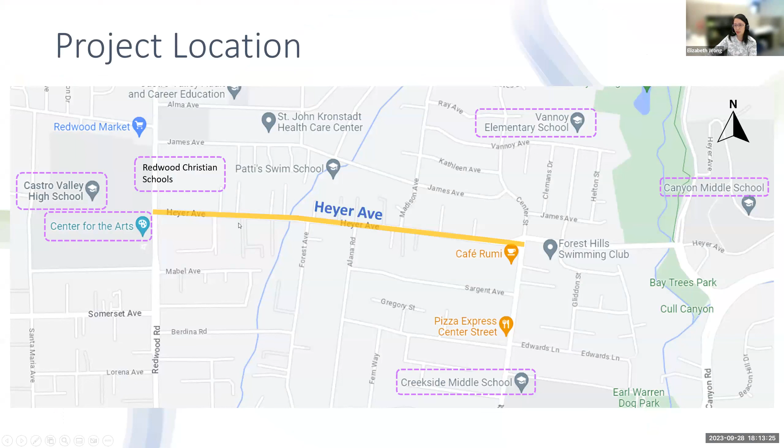Tonight I will present to you the Heyer Avenue Sidewalk Improvement Project. The project is located on Heyer Avenue in Castro Valley, from Redwood Road to Center Street. There are various schools, businesses, and points of interest in the vicinity of this area. Let's look at some of the existing conditions of the sidewalk.

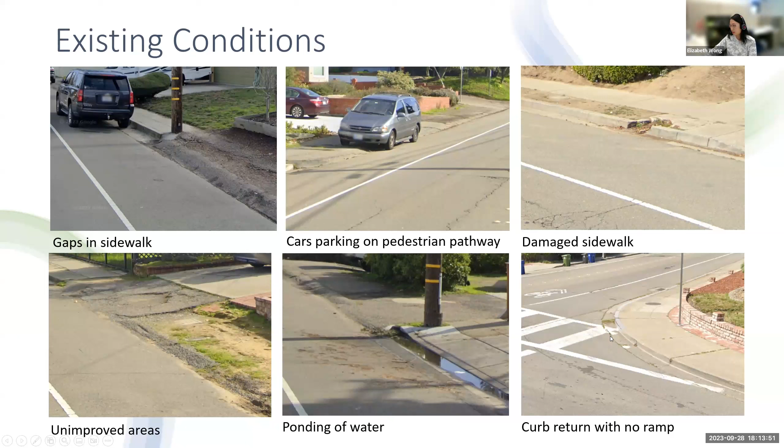Looking at the site photos, we can find gaps in sidewalk. There are cars parking on pedestrian pathways due to lack of vertical curbs. Some of the areas are damaged on the sidewalk, unimproved areas. We also find ponding of water and curb returns with no ramps.

To summarize what we just saw: gaps in sidewalk, pedestrians walking on the shoulder or roadway because cars are often parked on pedestrian pathways, sidewalk in deteriorated conditions at some locations, lack of proper design and unimproved areas, ponding of water due to lack of continuous standard curb and gutter, and there is also a bus running from Madison Avenue to Center Street on Heyer Avenue.

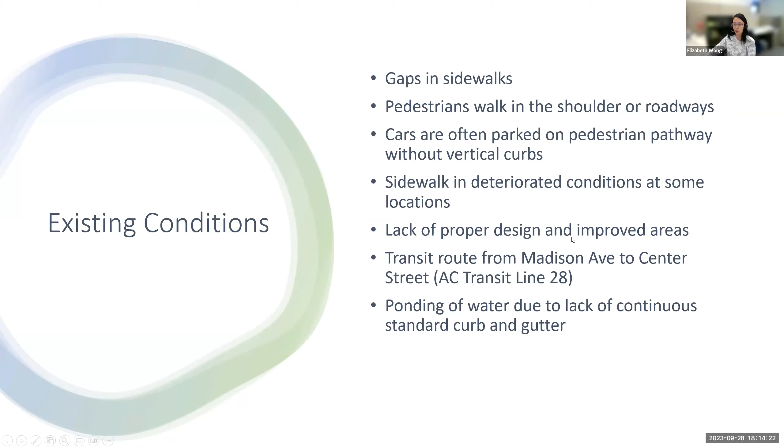This project is in our Bicycle and Pedestrian Master Plan as a prioritized sidewalk project. The plan recommends a Class 2 bike lane for Heyer Avenue between Redwood Road and Center Street. Our goal is to provide a safe and functional corridor for all users that enhances walkability and accessibility to local schools, businesses, and residents; implements pedestrian and bicycle facilities; improves traffic safety; improves drainage; treats roadway stormwater runoff; rehabilitates and repairs the pavement; and improves corridor aesthetics.

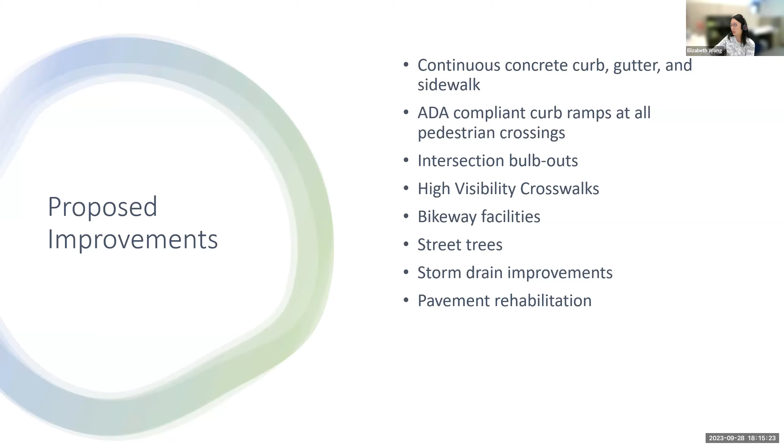To achieve the project goals just mentioned, we propose to provide a continuous concrete curb, gutter, and sidewalk, ADA-compliant curb ramps at all pedestrian crossings, intersection bulb-outs, high visibility crosswalks, bikeway facilities, street trees, storm drain improvements, and pavement rehabilitation. We have developed two design alternatives to incorporate these improvements.

The alternatives were developed keeping in mind constructing the improvements within the county right-of-way of 60 feet. Within this limit, design alternative 1 can provide a Class 2 bike lane on both sides of the road. We can also provide a 7-foot wide sidewalk for pedestrians. Parking on both sides of the road can also be maintained, and we'll put in parkways and trees where necessary. However, the bike lane for this design alternative is not buffered.

Let's look at design alternative 2 that we considered. Within the county right-of-way of 60 feet, a buffered Class 2 bike lane on both sides of the road can be provided, along with a 7 to 8 foot wide sidewalk on both sides. Bulb-outs and street trees will be included. However, on-street parking will be removed on one side of the road.

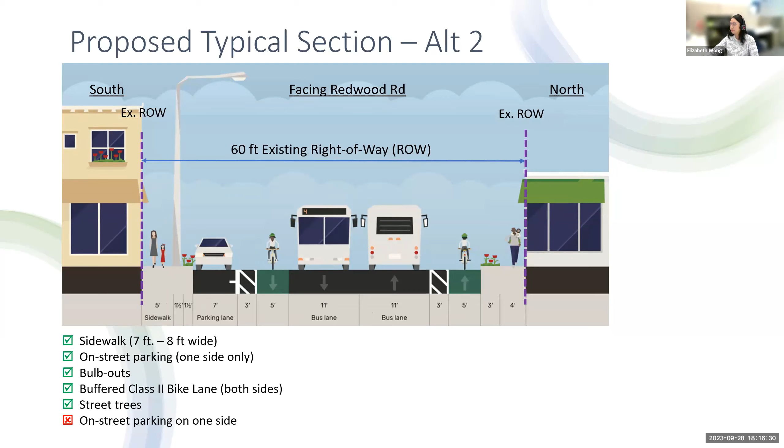Here's a summary table to compare both design alternatives side by side. Alternative 1 is our Class 2 bike lane scheme. For sidewalk, we can maintain a 7-foot wide sidewalk, and we can maintain on-street parking on both sides of the road. We can include bulb-outs and street trees. However, the bike lane is not buffered.

For design alternative 2, we can offer a buffered Class 2 bike lane. We can keep the sidewalk at about 7 to 8 feet wide. However, there's just only one side, so we can only offer on-street parking for one side of the road. We can also include bulb-outs and street trees.

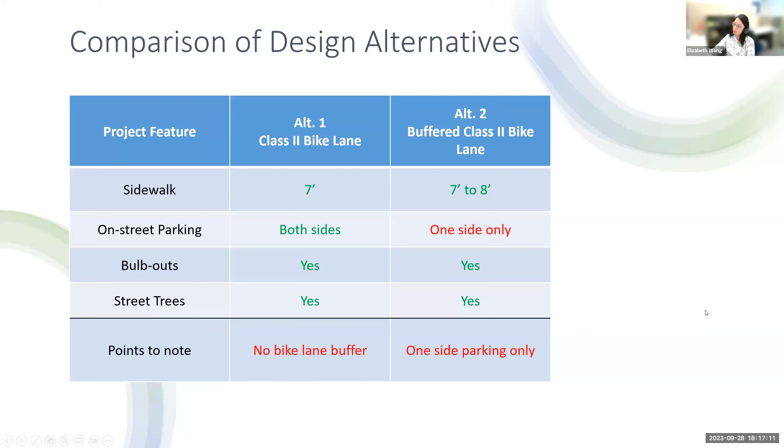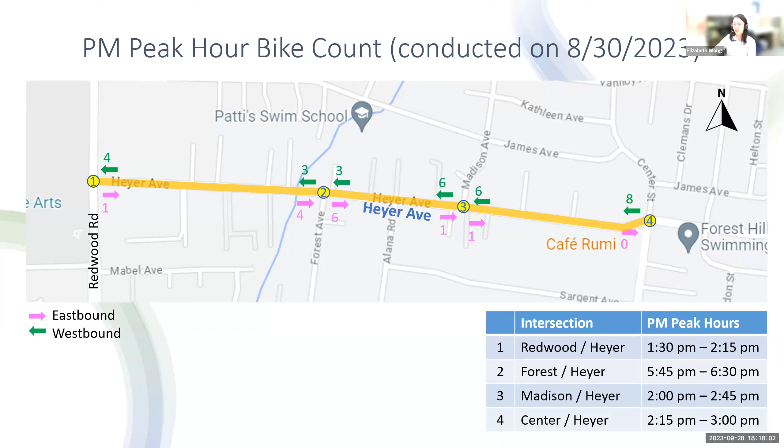This slide shows the bike count at the 4 intersections during afternoon peak hours. Afternoon peak hours happen between 1:30 to 3 p.m. at 3 other intersections, except for Forest and Heyer, which happens at 5:45 to 6:30 p.m.

A recent parking study was also conducted during the period of August 30th to September 6th to observe the parking utilization at various locations along the road.

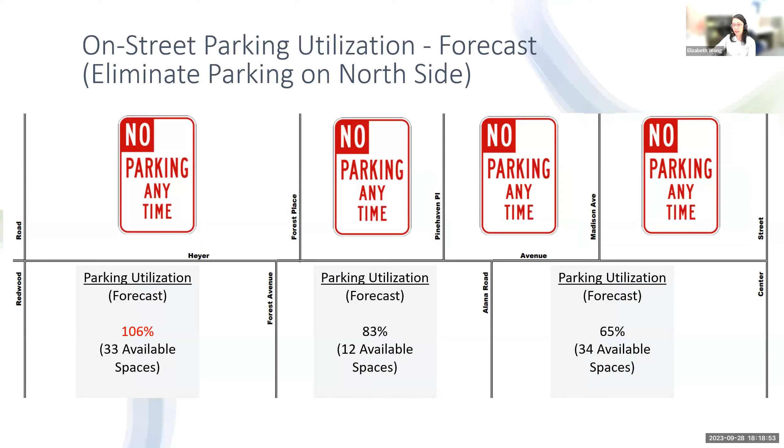This project is planned to be constructed within county right-of-way of 60 feet, but might change as design develops. It requires permits to enter for approximately 82 properties. Encroachments will be removed and property owners will be contacted individually.

We are planning to present this project at a public meeting in spring 2024. Final design is anticipated to be completed by spring 2025 and ready for advertisement in spring '25 as well. Construction and utility relocation will start in summer 2025, and all these dates are tentative.

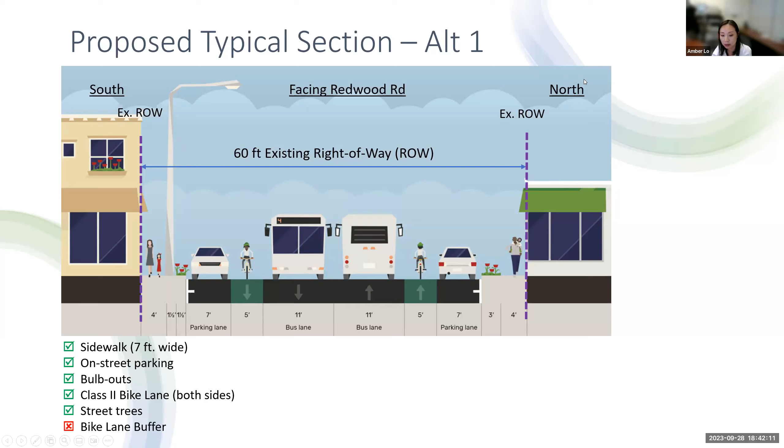Okay, can you hear me? I had actually raised my hand to talk about the previous item as well, which you may have missed, but that's fine, it's on the minutes. But on this, yeah, I think the counts firstly can be very deceptive. I don't know why you do the bike counts, because they always kind of come out low. They obviously will come out low because it's a very dangerous street to bike on. And then all that does is it really starts to create splits in the community, where you get these factions of people saying, well, there's nobody biking, therefore we don't need bike lanes. And it just really starts the whole process off in the wrong way.

The counts don't say anything about demand. And I think Bruce was making this point: what we need to do is measure demand, not current use, in order to drive the need for bike lanes. It's interesting that you don't count pedestrians to justify sidewalks - you just assume sidewalks are good. But if you applied the same concept to sidewalks, it would be interesting.

I don't know why in both examples the parking is against the curb, then the bike lane is to the left of that, and then traffic to the left of that. Why can't the bike lane be against the curb? Because the problem with that design is every time a car parks and leaves, they have to cross the bike lane. You can avoid that by simply switching those two around, having the bike lane to the right and the parking to the left.

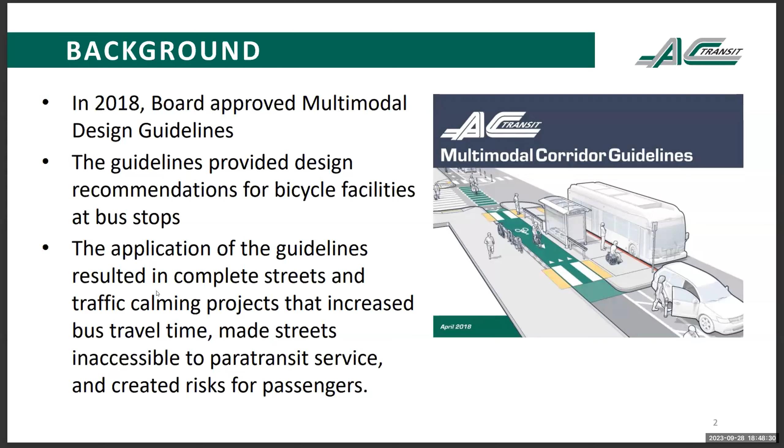This time around, we intend to expand on the guidelines and address how to accommodate paratransit needs, comfort for people accessing and waiting at bus stops, and other transit operational needs that should be considered, like bus layover space. So basically a more comprehensive set of multimodal guidelines that everyone can reference in designing their streetscape improvement projects. And of course, everything is context sensitive, and not everything in the guidelines is going to be applicable to every city street, like streets with constrained right of way or streets designed to carry high traffic volumes. But the overall intent is that the recommendations will be applicable to most streets.

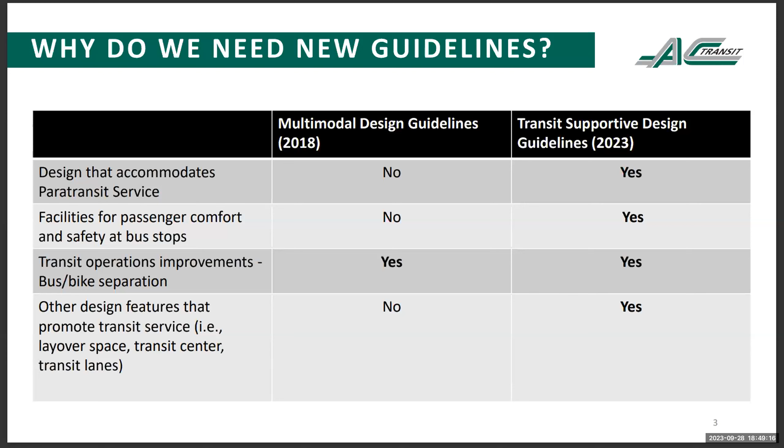I'm not going to go over all of these items, but basically the new guidelines document is going to include all this content and information that jurisdictions can work from, like bus stop dimensions, designs that aren't compatible with transit, minimum width requirements, paratransit operational needs, pedestrian safety and access improvements, bus layover needs, and so on.

On the topic of paratransit service in particular, paratransit is curb to curb service for people using wheelchairs or people with mobility needs. So it requires access to the curb and room on the sidewalk to deploy a lift or a ramp. Unfortunately, there have been instances of projects implemented in the AC Transit service area that preclude access to the curb. So we want to provide guidance on this in the guidelines so that cities and jurisdictions know that paratransit service exists, that it's important to accommodate access for paratransit users, and that there are ways to accommodate paratransit needs in their street designs. Really, mobility for people with disabilities should be accommodated as part of all transit projects.

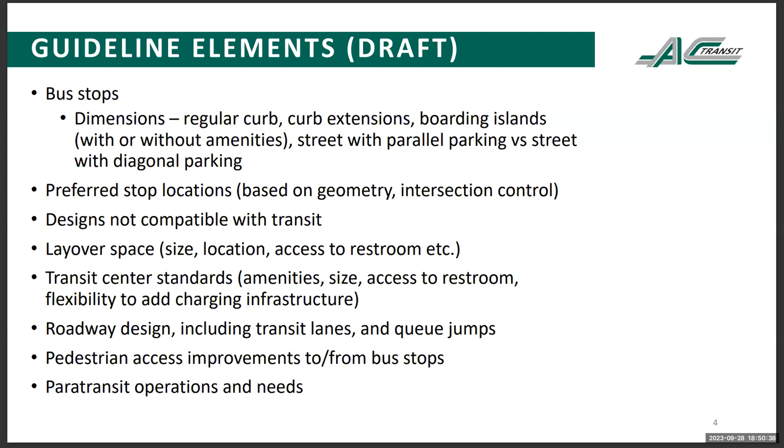On outreach, we plan to reach out to various groups like this BPAC, other BPACs, city transportation commissions, accessibility advisory groups, and a variety of other groups for feedback throughout this process. We'll also be developing a technical working group with representatives from all 14 cities in the AC Transit service area and the 2 counties. So in summary, just a lot of outreach.